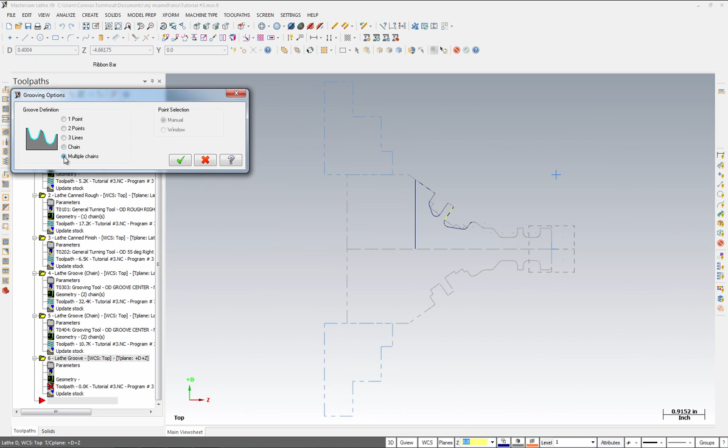So come up to the top and select Toolpaths. From here, we'll select Groove. Again, we'll select multiple chains and select OK. From here, we're going to select Last, which will grab the last operation in which we chained.

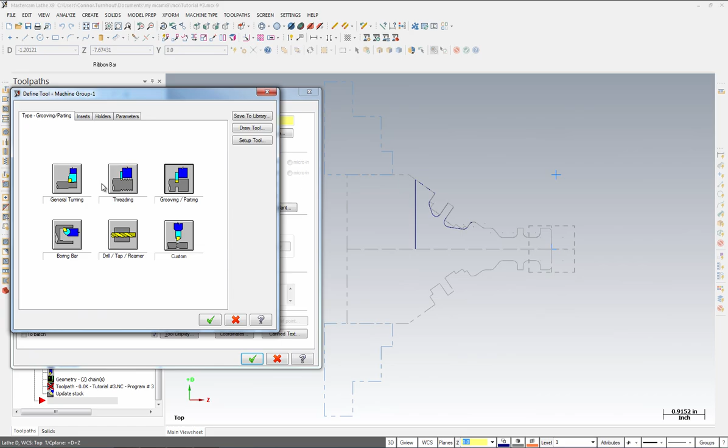Once you're happy with this, select OK. From here, you'll notice your tool display loads up. We will right-click this time, and instead of editing a tool, we're actually going to create a tool. So go to Create Tool and select a grooving tool. We're going to make a single end, but not the single end chamfer - we're going to select the single end radius, and ensure that the insert thickness is 0.188.

From here, we're going to change these values. We're going to change A to 0.1, and again I'm getting these values from inside the training tutorial. I'm changing B to 0.09375, and I'm going to leave C the same.

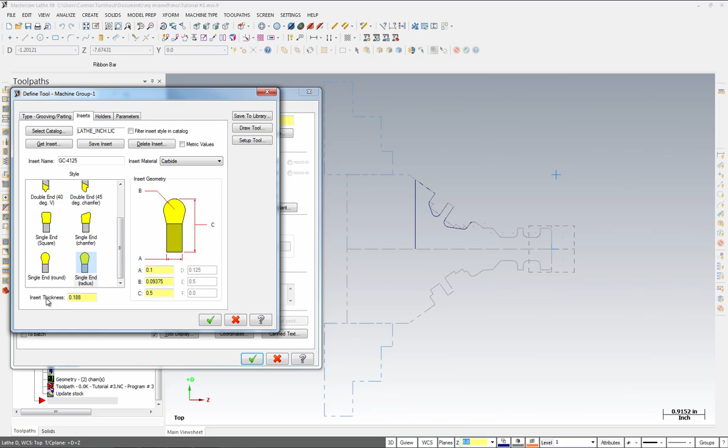Once this is done, come up to the Holders tab. In the Holders tab, we need to change D to 0.1, and we need to ensure that the cross section, or shank cross section, matches the insert thickness here. So we're going to give this a value of 0.188 and hit enter on our keyboard.

Once this is done, we will go to Parameters and we will give the name of the tool. So I'm going to name this tool 3/16 diameter by 55 degree tool. Once you have this established, the last thing we need to do is come to Setup Tool.

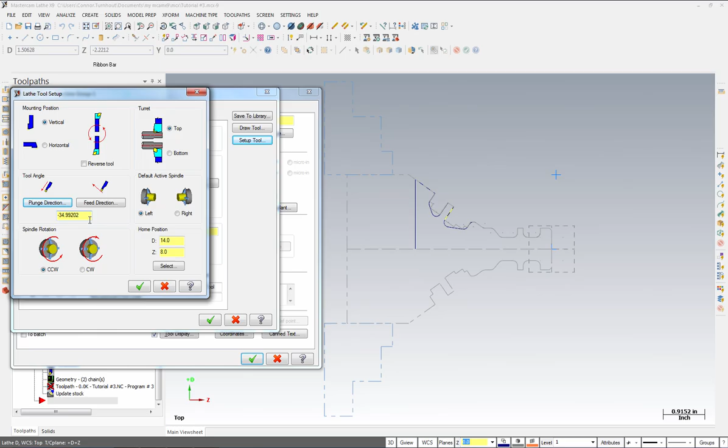We will also change the plunge direction. So select plunge direction and select the geometry we did last time to get the way the tool will be angled when approaching the part. From here, we'll select OK.

And we're going to actually draw this tool so we can see what it looks like, and you can adjust it if need be. Select Enter when done, and we'll move on from this point. So we're going to go ahead and select OK.

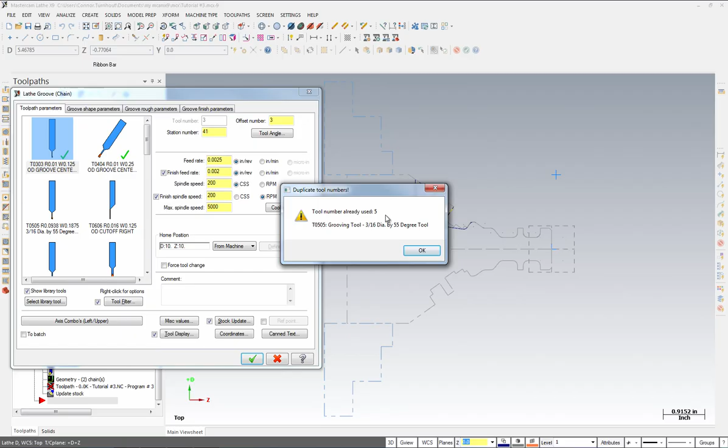The tool number already exists. If you get this warning message, just hit OK. So we're going to use our tool that we just created, and we're going to insert a comment: finish the groove.

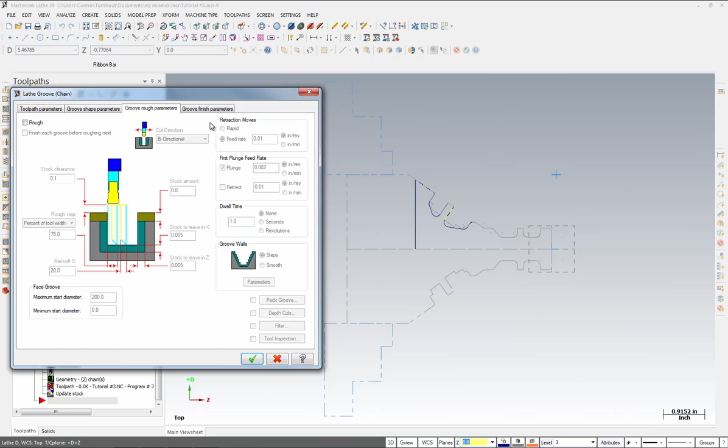From here, we're going to go to our Groove Rough Parameters. We are going to make sure that Rough is turned off. And under Groove Finish Parameters, we are going to ensure that Finish is turned on and that the values match your training tutorial before proceeding.

Once they do match, come to Lead In and select it. From here, in the first pass lead in section, we are going to make an angle of -145 and hit enter on our keyboard. Then on the second pass lead in, we're going to change this value to be -145 as well and hit enter on our keyboard.

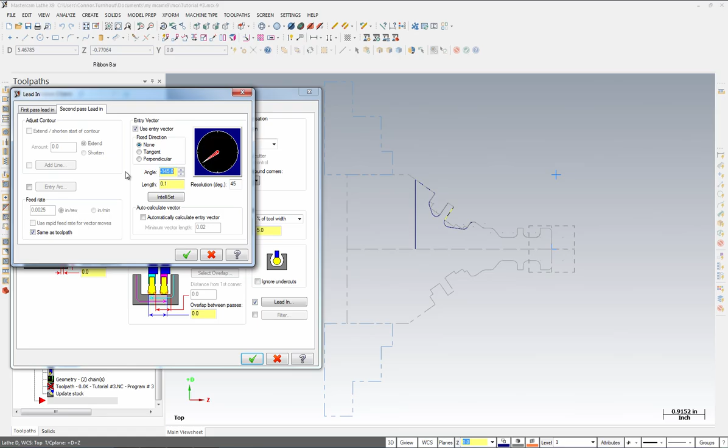Once this is done, select OK and select OK once more, and our tool will come in and clean up the leftover stock from our roughing operation. Once this is done, just go into your backplot and verify.

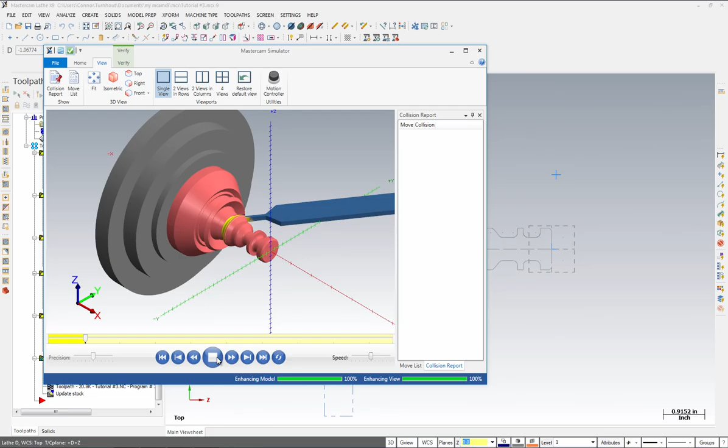Just going to isometric my part here and select Play. And this is what the part should look like. Select Close when this is done, come over to the left hand side and just toggle off that toolpath display.